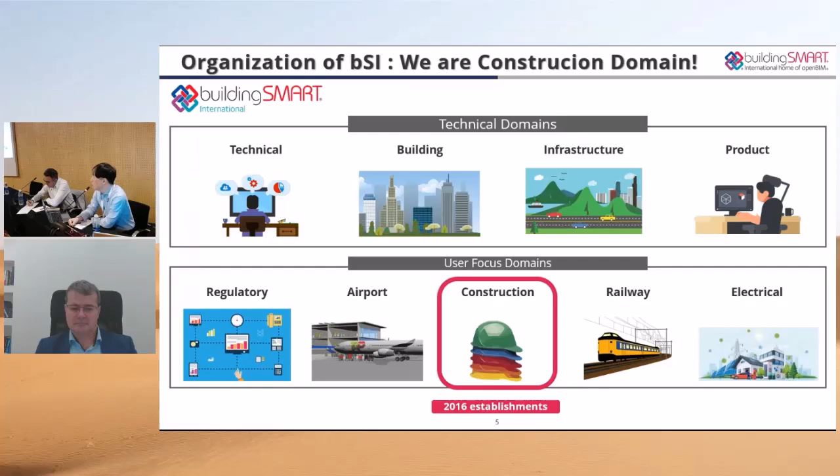Initially, we recruit a person to attend this construction domain. Our targeted person is like this, at the center is the construction. Construction company is the key player, but not only construction - also the BIM person, the IT person, and the IoT and manufacturing. This slide is old, but anyhow, the situation is like this now. Not only construction person, but also many IoT and manufacturing person are joining, and we need much more collaboration with other domains. So it means there's no border at this moment.

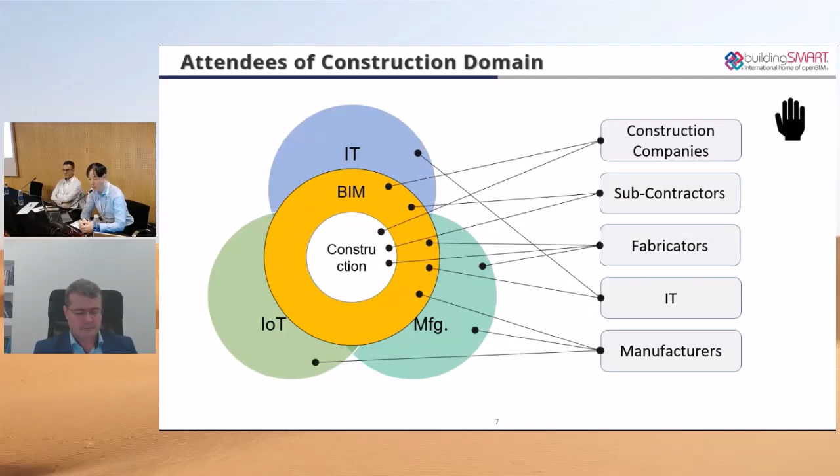And this is the main topics that we've taken in the summit session, and then highlighted very frequently.

Is it too loud? Still too loud? Oh, I'm sorry.

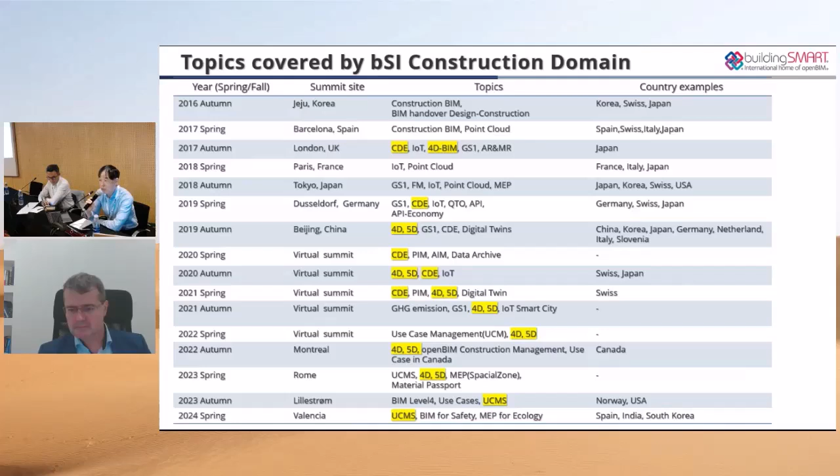From 2016, we can understand what's the trend and the buzzword in this area. In 2016, we had the topics of BIM handover and design. From 2017, CDE has been the very big topic, and then 4D, 5D we continuously took as a topic. Recently it's much more diverse, and we should think about IoT - not just change the topic, but we should think about creating community as a very big topic.

This one is some information of Marrakesh and Morocco. Before I came here, I researched on the web - these three are the very main infra projects in Morocco. If there is someone involved in those projects or related projects in Morocco, I would like to hear much more information. But how about you? Is there someone? No, not many Morocco people join this summit is my impression, but yeah.

Okay, so it's just a web search, but here's the very big infra project. One is highway, another is also highway, but railway - a high-speed railway. And the last one is a stadium. In this country, the very big infra project is run by government with very big capital from outside the country. That's the situation, and I researched that many companies from foreign countries join the project. So for a Morocco person, it's very important to think about how to maintain all those big infra for the long term, and it's a very good timing to adopt openBIM and the IoT-based operational management system for the future.

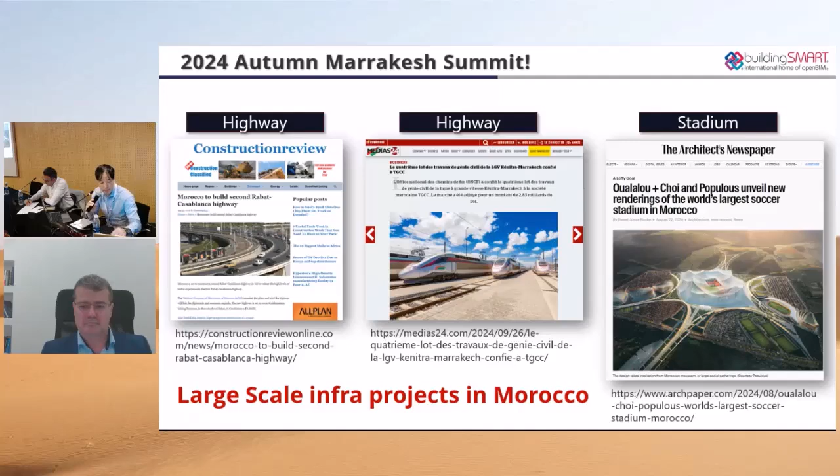So today, I'd like to share very fundamental consideration of building an openBIM ecosystem. It's from my more than 25 years experience in this area, and I had many very innovative attempts and systems in the BIM area. But if you skip a very fundamental step, you cannot create a very long-term innovative tool or ecosystem. It's my strong thinking recently.

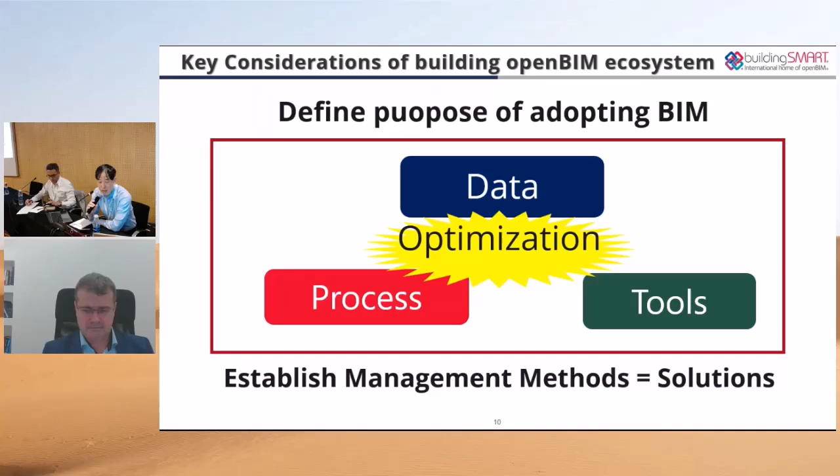So that's very simple. There are three functions: data optimization, process and tool optimization, and establish some rigid management method. So your solution by yourself is very important - not adapting the system from outside one by one. It's very far from success. It's my opinion.

So first, consideration one: optimize data. So what we should think about is this flowchart. It's very famous, and I guess all of you know this chart.

It describes ISO 19650, and it was described many years ago. It starts from the beginning, the top right side, and then it goes leftwise - it's round the time run by. The next step is creating the EIR, Employer Information Requirements - abbreviation EIR. Then someone says not employer, but exchange information requirement as EIR. It's very important - initially we should think about the long term and the whole life cycle data management process, including the owner of the project.

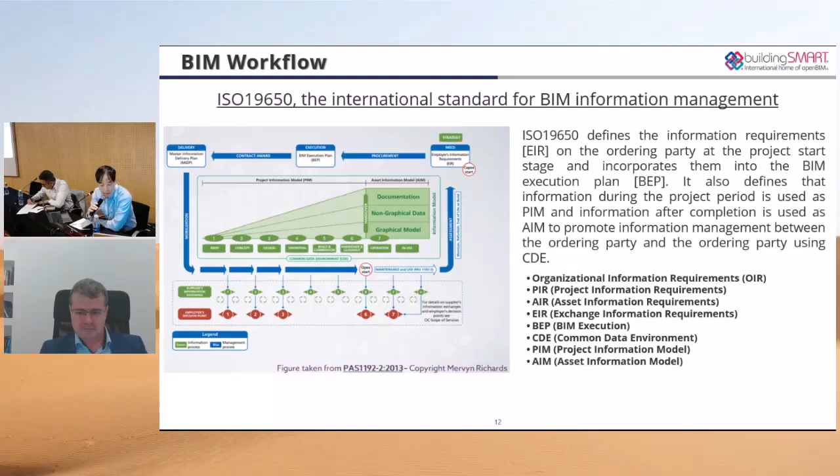And this one is my proposal. If you are against or object, anytime you can raise a hand and give me some opinion. But here, this is the timeline from plan to operation management. It's the life cycle of the project.

And as I mentioned, in the operation and management phase, the data utilization should be defined in the employer's or exchange information requirement. And the people who think very long-term should select IFC as the file format or schema of the data in this O&M phase. And next, in BEP timing, you receive the EIR from the owner and then think about the BEP as a construction manager.

Firstly, the owner's requirement is IFC for the operation and management term. So we should create the IFC to submit when the project is completed. So the IFC file should be the file for exchanging, and the published data in the construction phase.

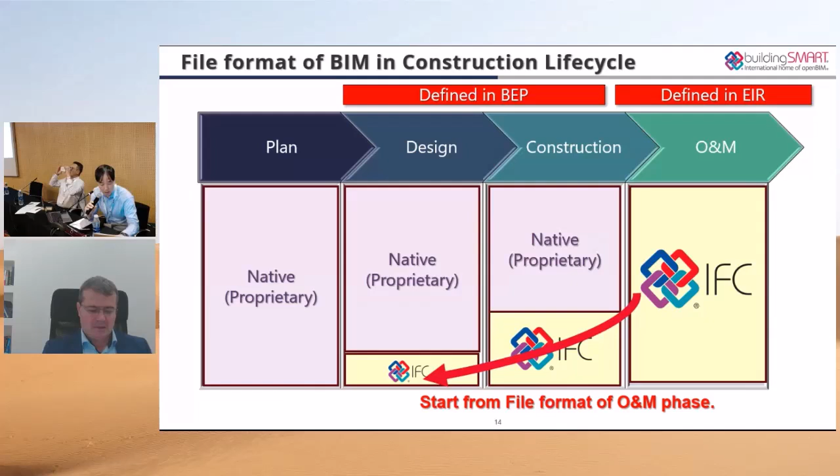Do you have any questions? Do you understand me? Okay, yeah, okay, thank you.

So my proposal, why start from the file format of the O&M phase, is we should think about the exit plan first, and then the very bold and robust data stream flow first, not the branch area, but the very large trunk area. So long-term, whole building lifetime optimization is what we need in creating the EIR. And IFC, as you know well, consists of a plain text file and is the best option for long-term use as a corporate data asset.

So planning how to create and archive BIM data through the project is the project manager's role. And how to manage versions and disciplines of BIM data should be considered very deeply in the early stage. First step and next step, the detailed plan. In the early stage, it's quite difficult to decide the process and tools in detail. And of course, imagining the operation and management process and tools in the early project stage is very, very difficult.

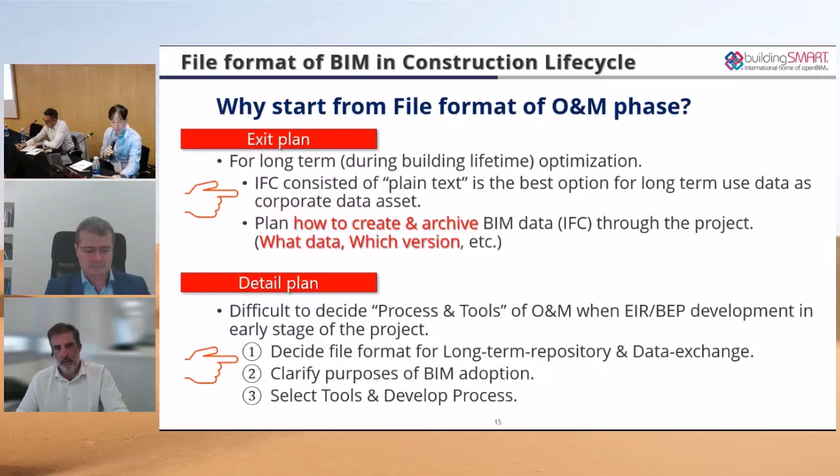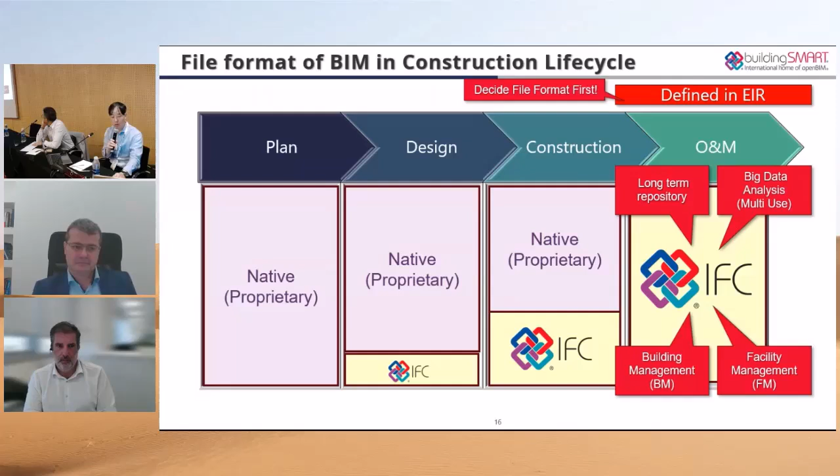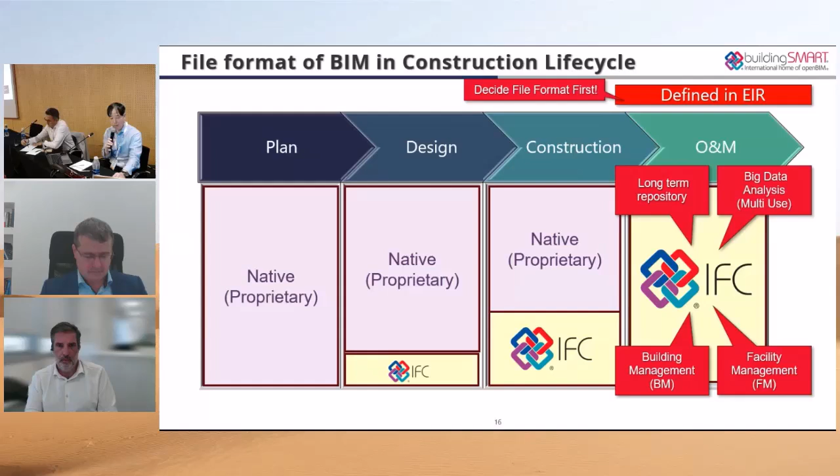So back to this chart. Define in the EIR that for operation and management, the file format should be IFC, and it should be described in the EIR. Deciding the file format first is very fundamental, and it makes the later process easy. There are four reasons. For a long-term repository, IFC is best. It's also good for big data analysis. And for building management, BM, and facility management, FM, it's quite usable if we can provide IFC files to the O&M phase.

Next, in BEP creation, we should think about a much more detailed, near-future plan, not the O&M phase, but the design and construction phase. We know many software. Basically, you have some standardized software for BIM creation, such as Revit or ArchiCAD or others. That's the center, and then think about the file format for intermediate files for data exchange, and expand to more systems and software for your convenience and purposes.

Yes, and then recently we take this IFC as a shared file and also the published file in each of the phases.

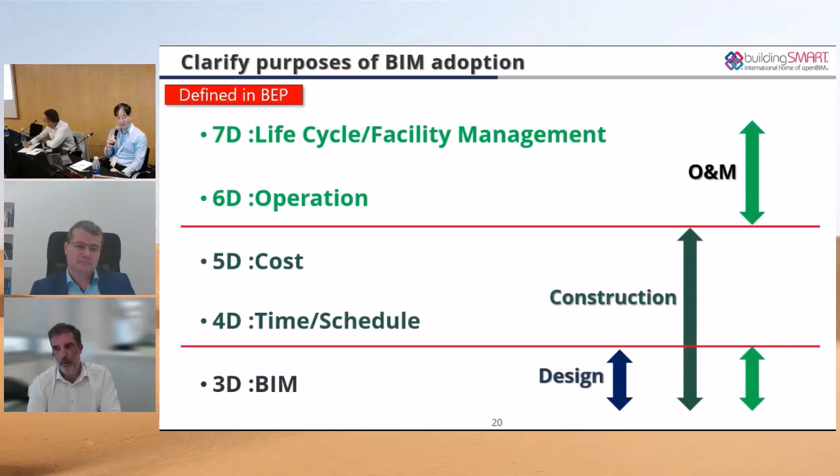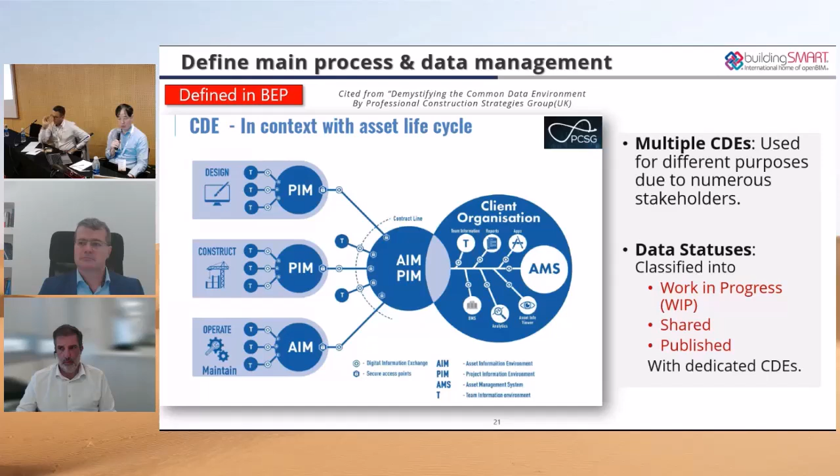So we should think like this. In the very initial plan phase, of course, there is work in progress data that's shared internally in your team. And then next, it's shared to some stakeholders and published. But in the plan phase, its data volume is still not big.

But from the design phase, some people joined: MEP, architecture and structure. So there are minimum 5 disciplines, and the work in progress streamline runs 5 times. And then they share each discipline's BIM data and then publish some of them.

And then after completing the design phase, the published data should be handed over to construction, and it will be the input data of the construction BIM. So it starts from work in progress in the construction stage, and is shared and published. And finally, all those data will be handed over to O&M. It means the owner.

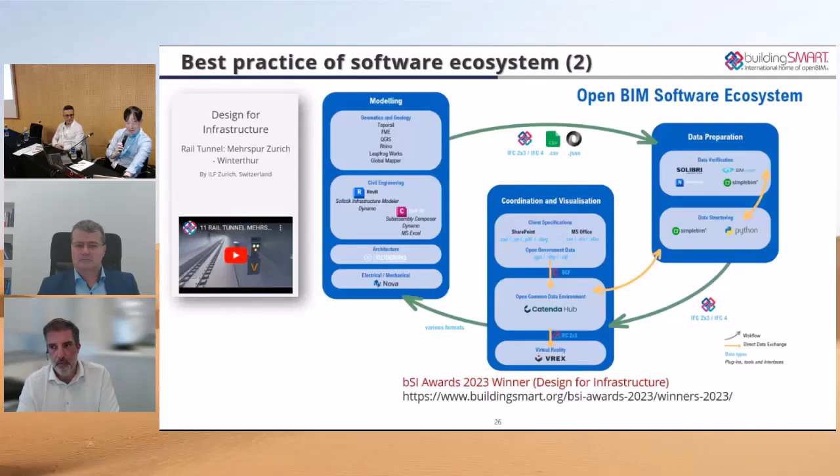Yeah, that's a very good question. But it's not a technical issue, it's ownership: who owns the BIM data of the construction phase or design phase, and whether all those data can be owned by the owner or not is a very big question. We, the general contractor, create the federation model, working with many specialized companies. They submit their BIM discipline models, but who owns those data, or the copyright of the data, depends on the contract or the law in your country. So it's very complicated, and I guess we should discuss it in the regulatory room maybe. Yes, it's true. Thank you. Yeah, thank you very much.

Do you have any question or some good answer for ownership of the... Can you hear me? Oh, yeah. Yes, very cool. Is it okay if I and also Ricardo make some comments? Yes, please. Okay. Thank you for this presentation, very informative.

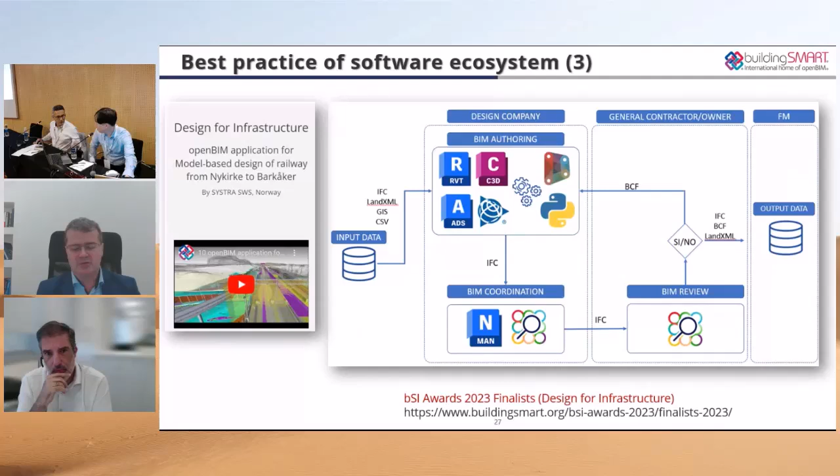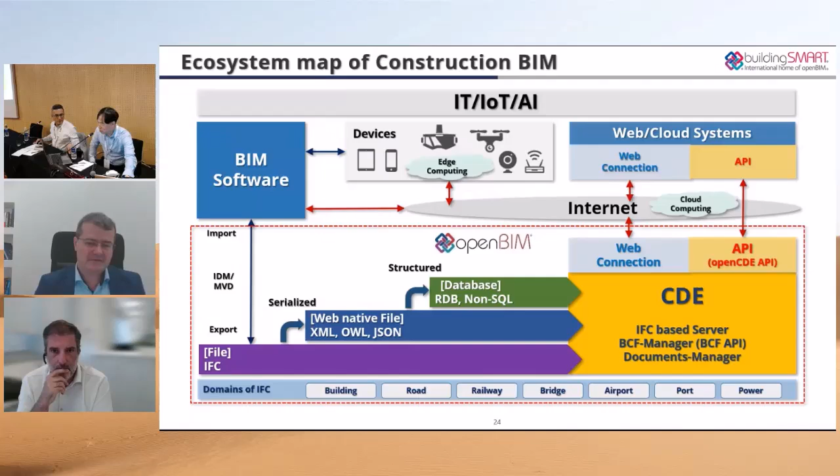Because of that, I would like to mention several things. If you can go back a couple of slides, to when you started with IFC implementation in each stage and mentioned the operation and maintenance stage, I think the third or fourth slide. Go back a couple of slides more. When you had this IFC in four stages, the last was operation and maintenance, even before that.

Okay, this one is fine.

So just to tell, and I hope this will change in IFC 5, what is the current situation? First of all, we have to be aware that there is not full semantics in IFC. That's why we sometimes need a native file, because those native tools have the full semantics, which we don't have in pure IFC files, and these things are changing and moving to the better in the future.

So the challenge is first operation and maintenance. Although we consider this a static situation, it might not be. We might have renovation. So when we finish the modeling, we still might need to change some things in the future. This is the first thing we have to be aware of.

The second is that we still do not have incremental models, which I honestly believe is necessary, and I would like to hear the opinion of the others on how to solve this. Just a small use case: I change one wall width from, I don't know, 10 centimeters to 50, and I need to update the entire BIM IFC file, and this is not very efficient.

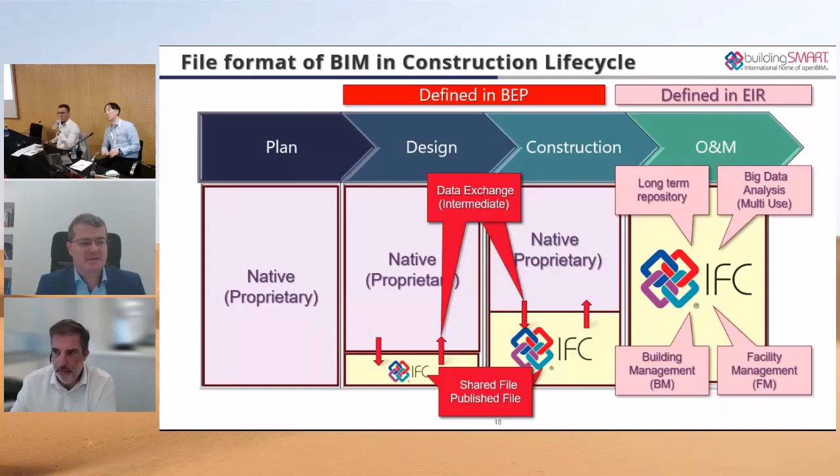The second is geometry optimization. I showed the case where one chair for the football stadium contained 227,000 triangles. And when you reduce it to 800, we as humans cannot notice the difference. This is almost 1,000 times, or let's say 250 times reduced geometry.

That's why we are allowing our tools to reduce geometry, sometimes even to an oriented bounding box, because we would like to analyze things and not spend the entire time loading, downloading and uploading the models. It's so complex, it takes so much time, and it requires powerful machines, and sometimes on site we don't have them.

So my suggestion, and it is also the vision of IFC5, is to have several geometries attached to a single element. So I can load a schematic model, or I can load the perfect model for rendering purposes.

And the third thing is how we are organizing the model. Yesterday in one neighboring country, one ministry on the largest project had issues. They wanted to upload 4 gigabytes in a single IFC file and analyze everything in that single file. The internet was, as usual, not very good, and it took them a lot of time just to upload it. And then people could not download the file because it's 4 gigabytes.

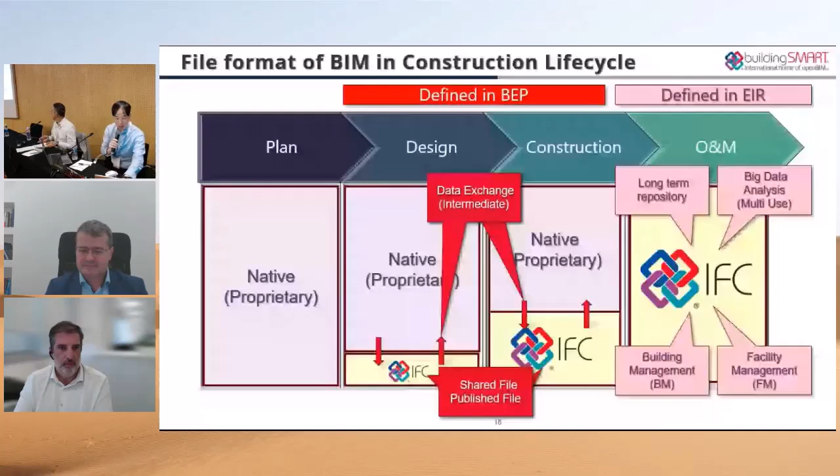Thank you very much, but anyhow there are some more slides. If I explain them and then close this session, you can understand much more deeply. So let's come back to the slide, and then I'll finalize this, and then we see the last one: the extension of the openBIM ecosystem.

So till now I explained the very fundamental, internal BIM ecosystem. But if we adopt AI or generative AI, it's not purely in this domain. AI is a big possibility, and ChatGPT is generally used now to digest documents or text.

But now we want to try to generate some IFC or BIM data by AI, which is the next challenge. Not all of us can get into this area, in my opinion—it's a very innovative area. The game changer will create a very strong or standardized system of AI BIM, or that kind of thing. There's some possibility for this in the future.

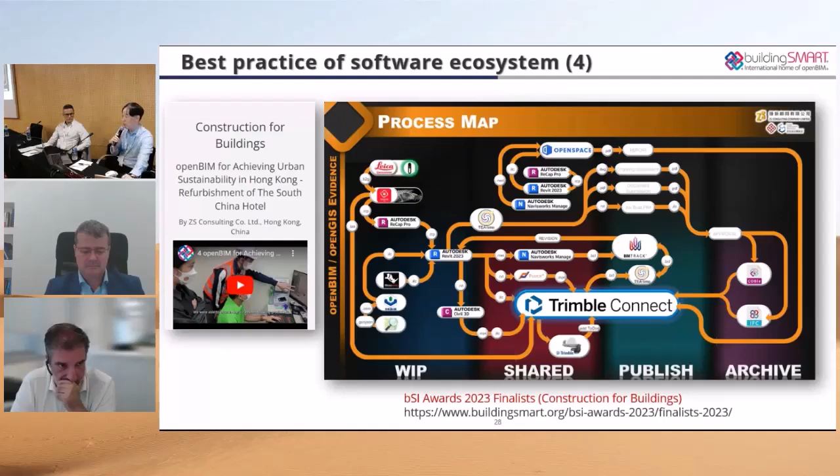But even if it happens, this kind of basic style, the data management skill, and process management is necessary. It's the foundation of the BIM area, and it is needed in construction management, in my opinion. So I want to finalize.

So the next extension is not purely in the BIM area, but other collaboration. We need much more collaboration in other domains, such as the AI domain. There are some big AI giants, OpenAI, or Microsoft Copilot, that kind of thing. It's a newcomer, and we will shake hands with those giants or new ventures also.

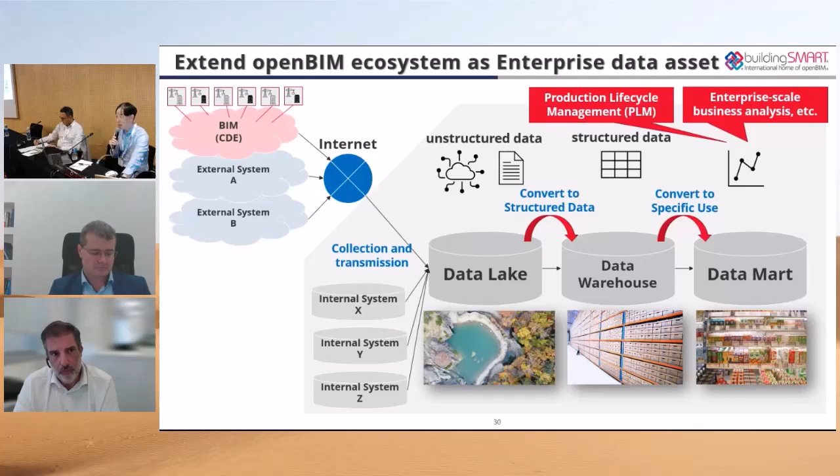So finally, the BIM data will be shared. In CDE, it's extracted and transferred to a data lake, and it will become part of the data. If we adopt machine learning or generative AI, we can create much more data in a short time, and much more intelligent data, with just one click or so.

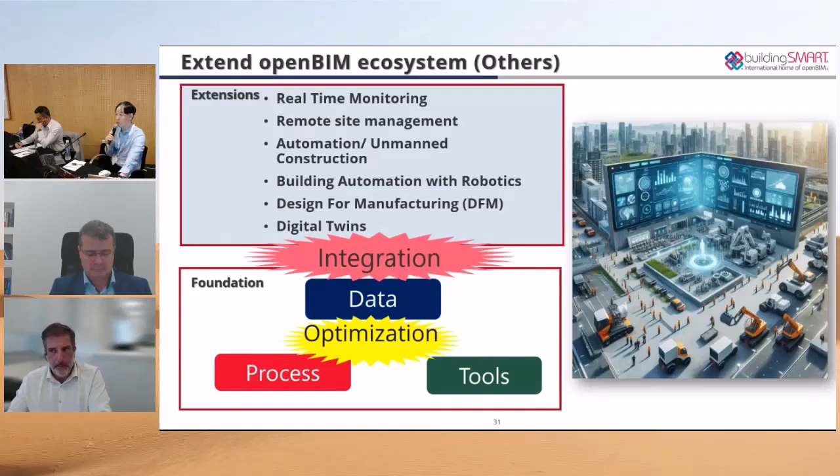But anyhow, what I think is many things are happening, and we are very congested and confused, is what I'm thinking. So to start from the very basic and then move into the innovation area is my suggestion. Data process tool optimization is the very foundation area. Next, much more integration and collaboration with other systems, such as real-time monitoring, remote site management, automation, robotics, and also AI, is the innovation area based on this foundation. Yes, that's the end of my presentation.

This one is optional, but there aren't many people from Morocco here, so I'll trim these several slides. That's the end, thank you very much.